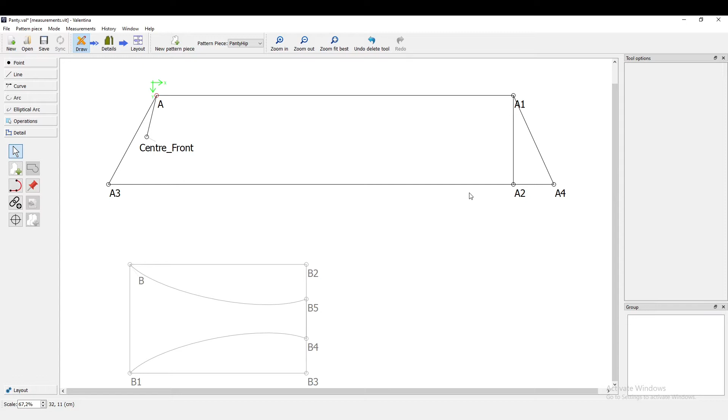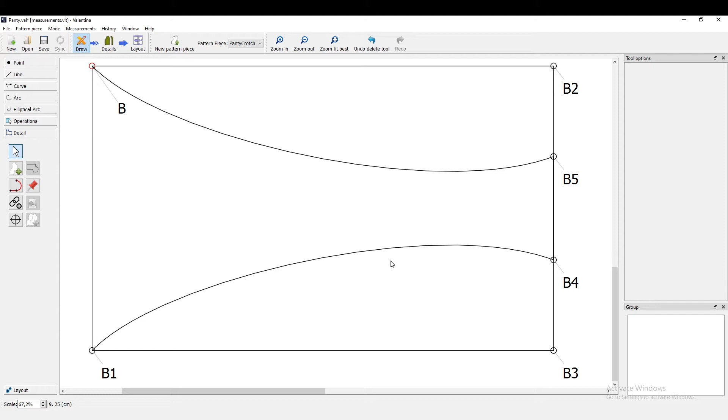And last time, if you remember, we created this panty crotch pattern piece. And I was wondering how to mirror the two curves, because we want identical curves on the upper and the lower side. And I found a solution. I don't know if there's an easier way, but it's not that hard, so I'm going to quickly explain it to you.

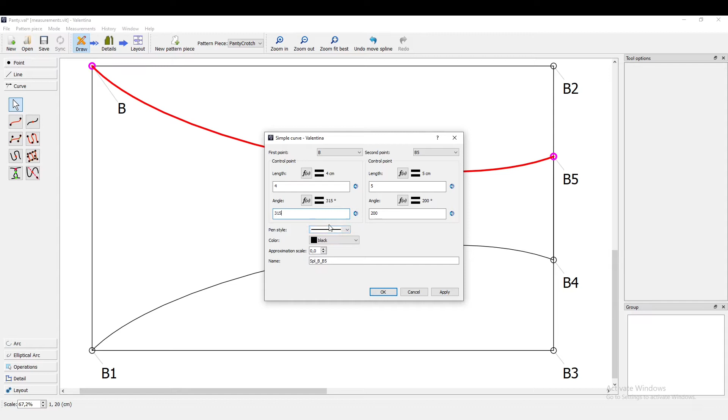What I did was I drew this curve with the curve tool, and then I get these two control points where I can just change them when I drag and drop them. What I can also do is I can actually write down exact values, and this comes in handy when mirroring two curves, because in order to mirror this curve along this edge, I simply subtract my angle from 360 degrees and I get my mirrored angle.

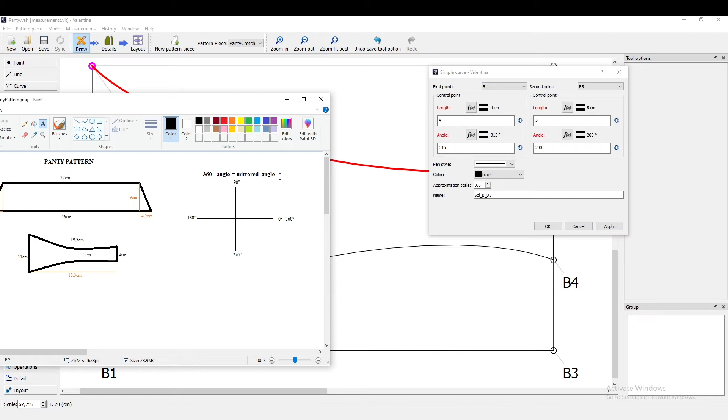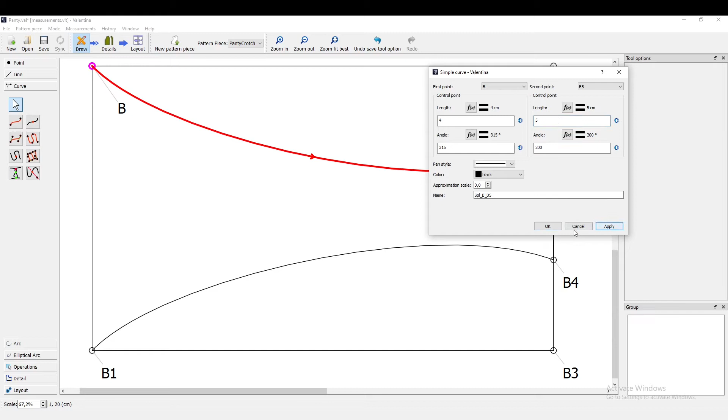So if I take this one, 200 degrees, and I subtract it from 360 degrees, I get 160 degrees. And this is the angle for the control point on the lower edge. We're just gonna take the same lengths. So now you can see on this one that I have the same lengths, but I have different angles because these are the mirrored angles. 160 plus 200 is 360, and 45 plus 315 is 360. So now we have perfectly mirrored curves.

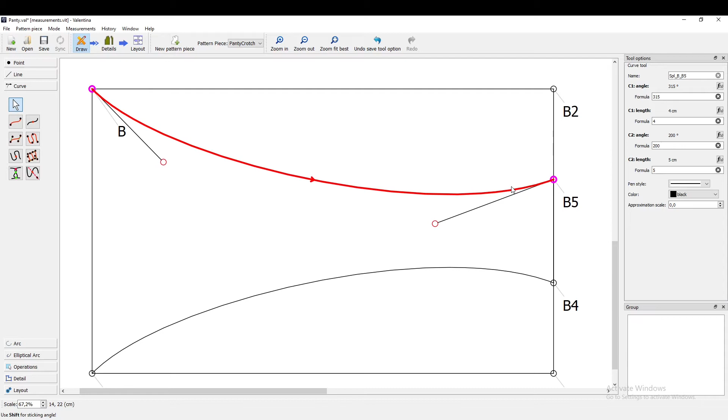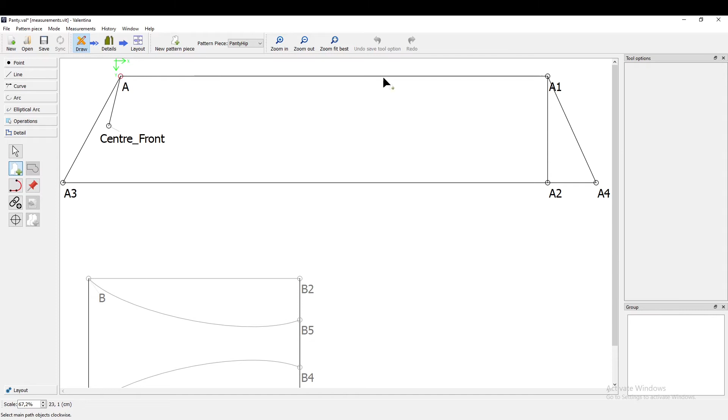That's great. So as a next step, I would like to go back to my panty hip pattern piece. And now we want to go into details. And in order to do the details, we have to create a workpiece. We do this by entering the detail mode, and then we select the workpiece tool. And we're just gonna select all of these points in a clockwise direction. Press enter.

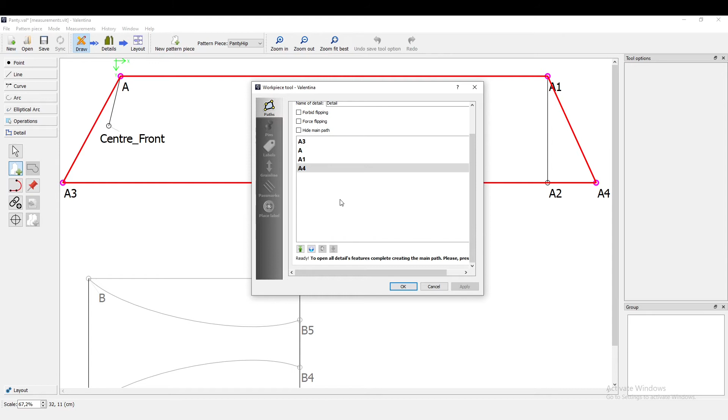And here we have our points. If it says ready down here, then that's fine. Sometimes if you didn't select them in clockwise direction, it's gonna give out an error. So just be aware of that. Press OK. Now we can go into details mode and we have our clean pattern piece. Because in the drawing mode we have these lines which helped us build the pattern, but we don't actually want these lines later.

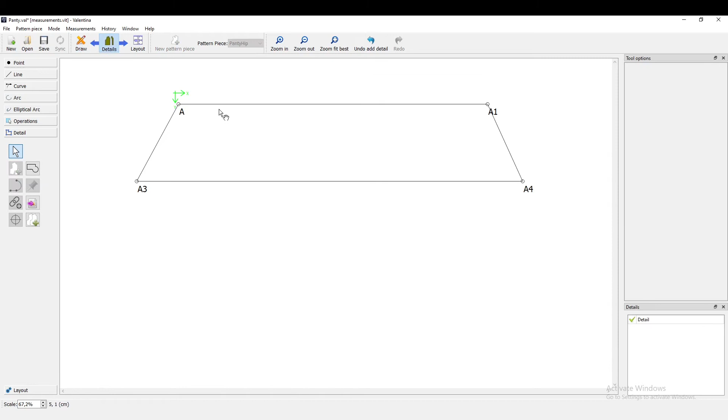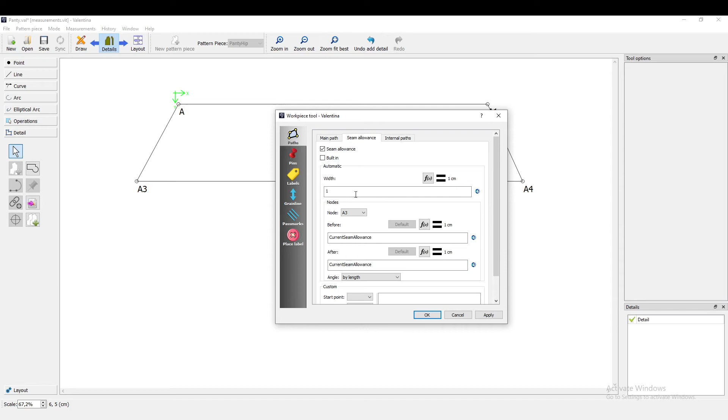So now we have the clean pattern piece, and what we can do now is some very useful stuff. For example, we can add seam allowance in here. And the basic seam allowance in this program is 1 centimeter. I can still change it in here if I want to, but I'm going to leave it like that. Press apply, and then we have seam allowance all around the pattern piece.

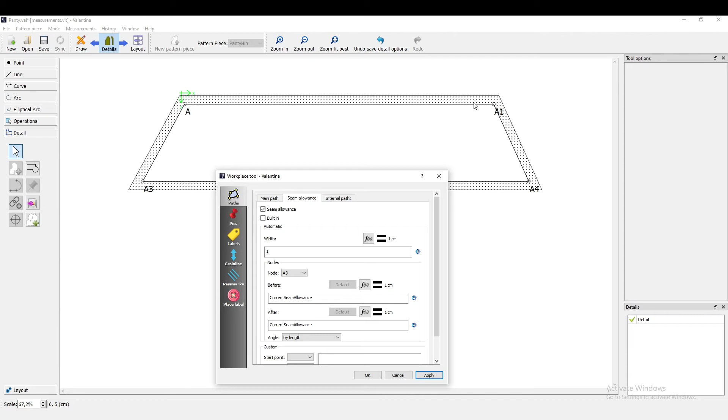But in my example here, I have a panty pattern and I'm gonna make it out of lace mostly. So I don't want seam allowance on the lower edge, because that's where the lace is gonna have its decorative stitching. And on the upper edge, I'm gonna sew in some fold over elastic, so I also don't want any seam allowance up there. I'm going to show you how to adjust the seam allowance for every edge. And this is done by selecting the nodes.

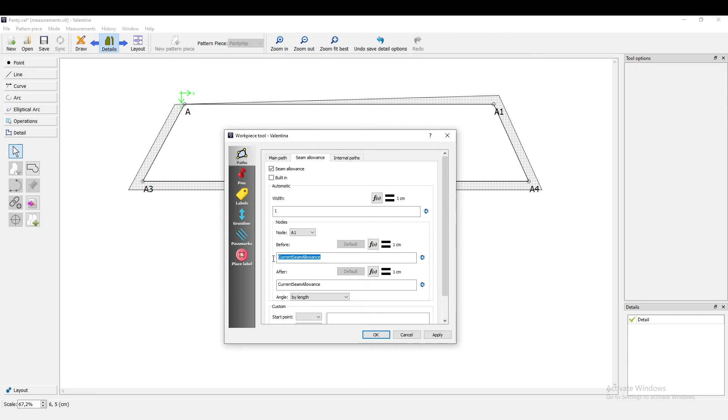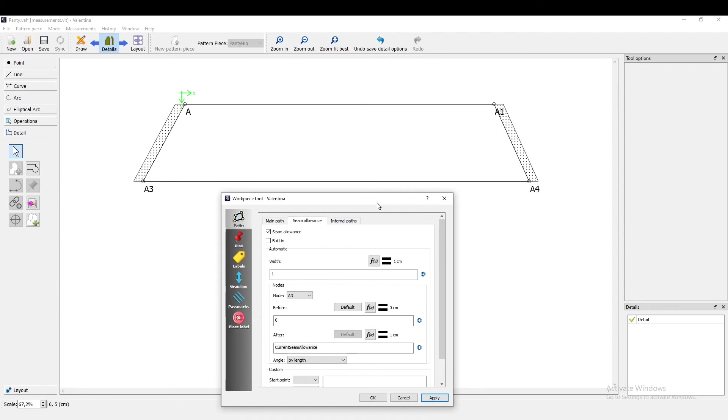So for the upper seam allowance, I'm going to select the point A, and as this is operating in a clockwise manner, I'm just going to say that after this point I don't want any seam allowance. Press apply and it's gone. Now I have to do the same before A1. Before, no seam allowance, 0, apply. And the same thing for A4, after, no seam allowance. And before A3, no seam allowance. All right. Now this is how I wanted it. Seam allowance only on the left and right sides.

Okay. Now what we can also do is add a label. We can go to labels and fill in some label data. So the letter of my pattern piece is A. My pattern piece needs to be cut out 2 times. It's not on fold, and you can add some more information which I don't have right now. So this is just some basic information, and we can edit the template here.

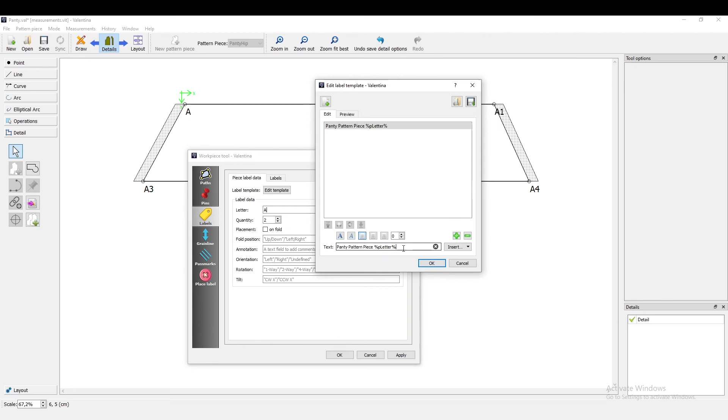We need to add a new one, and I can fill in, for example, the name panty pattern piece. And then, which is very practical, I can insert variables. For example, the piece letter we just filled in. And then I can also say, okay, I need the quantity of my pattern piece in here. I want it to be in bold and centered. Okay.

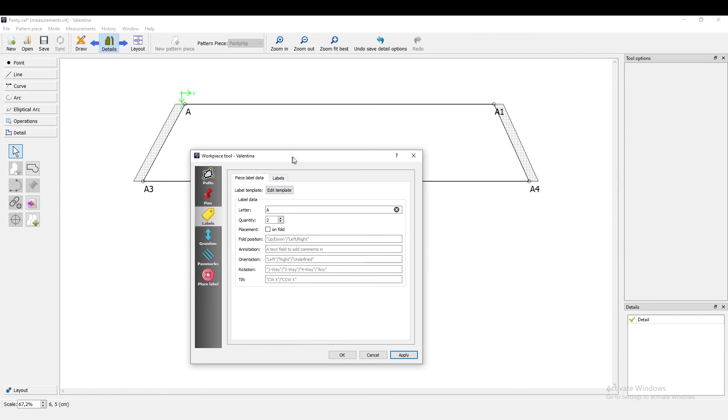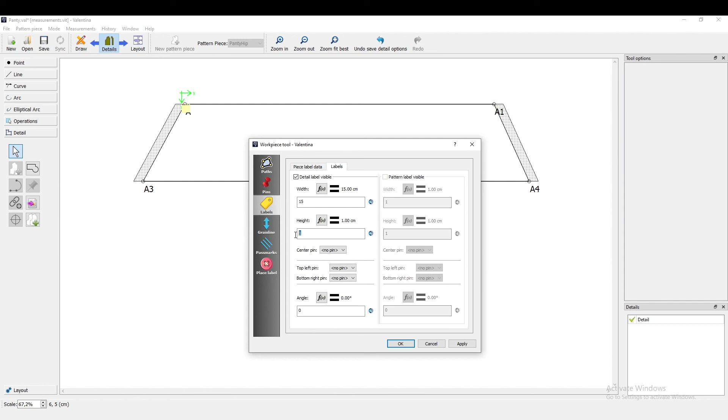Now if we press apply, nothing's happening because we didn't activate it yet. We need to activate the label in here. And now we can see it, but it's super small. So I'm going to go up to 15 centimeters width and 5 centimeters height.

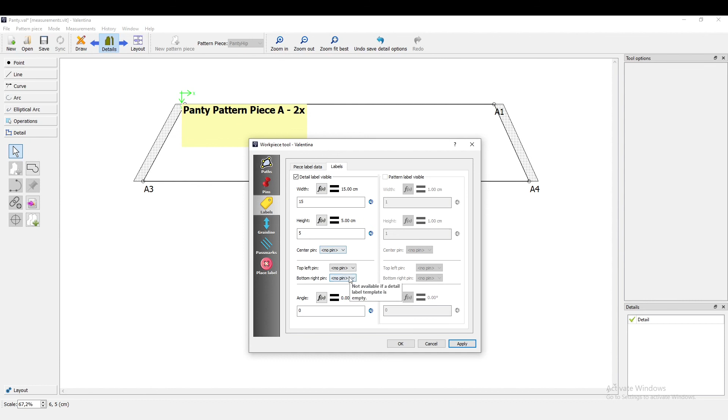Apply. Much better. And in the drawing mode, we can also add pins on points to mark some kind of reference point for a label or different markings. But right now I don't have any pins, so I'm just going to drag it where I want it to be. That's also fine.

And some more options. We can also add a grain line, which is very useful also in this case. Just gonna press apply, and it's very small, as you can see. I'm just gonna go up to about 10 centimeters. And also I'm going to rotate it, because in my case it's the other way around. And I also just need the rear arrow.

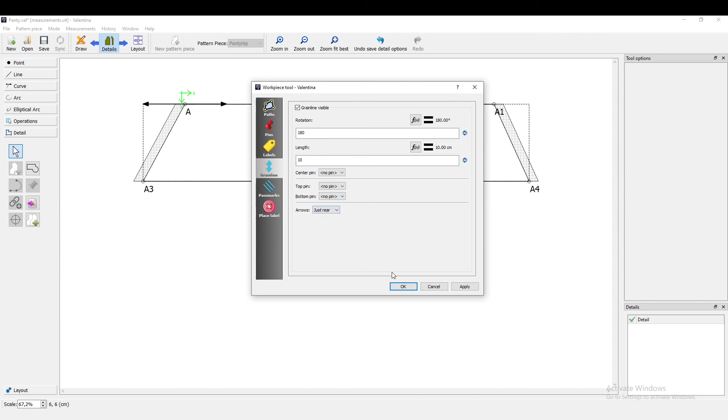Okay, and I can also drag it, or I can also use a pin as reference point, which I don't have right now, but this is fine. So this is our pattern piece. Looks fine. Now we can also do the same thing for the second one.